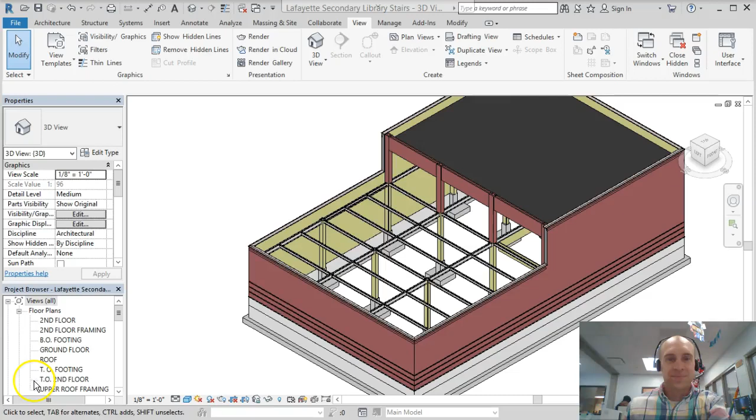You have made your EPDM roof, and now I'm going to show you how to make your green roof. So we are in 3D view. Let's go to second floor view. And don't worry about these things here. You're going to put stairs and an elevator in later on.

I'm going to go to roof. And I already had one created, but your default right now is basic roof, insulation, and metal deck EPDM. And we're not going to worry about changing that right now. We're just going to make the outline.

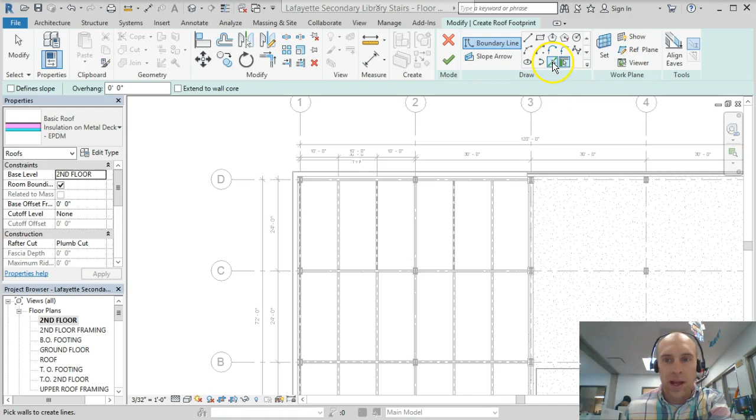So if we click this pick lines, and I'm going to choose just inside here. And this edge, you notice we're not wrapping this one. That one is fine just the way it is. But on this right side, we're going to wrap. So I'm just going to do one of these to give you a couple tips as to how to do that. I like mine on thin lines. We'll go back to Modify Create.

And I'm going to choose the outside edge of this. And this one, you see, it doesn't matter if it's connected necessarily. And this center line. So I have a whole bunch of lines on here. And really all I want is this line and this line. So I click on this Trim Extend.

And if I choose this side here and this line, you notice it trims it to that corner and we're all good. Now if I clicked on this side instead, so I just undid that, and I choose this side and here, it trims to that corner. So you need to be careful. Make sure you click on the line that you actually want to keep, or on the part you want to keep. I want to keep this, and then I just kind of work my way around.

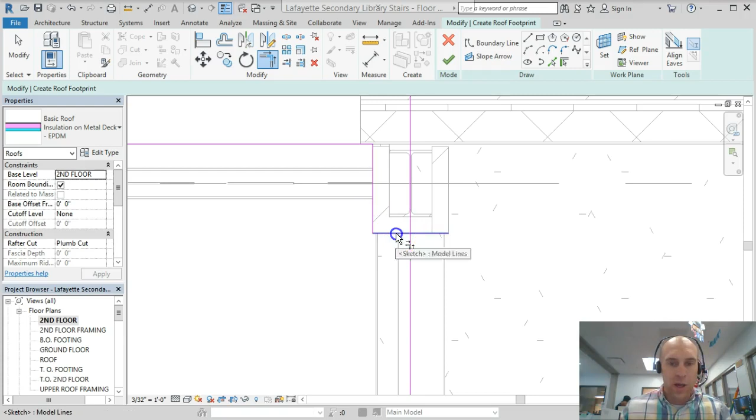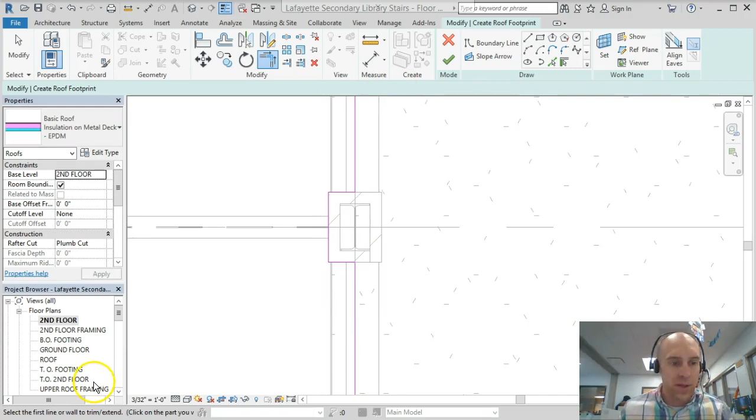This and this are connected just fine, but I want to go here to here, and then that trims that away. So you'll go ahead and continue by drawing more pick lines, and just choose one of those, and then we go and we trim and so on. You can see it deleted that part of the line down there. You'll have to add that again, and then just keep trimming away, and eventually you'll have this whole thing wrapped. So do that right now, and then you can join me again.

So my columns have been trimmed around. You can kind of see each one of those has those lines, but in these corners they're straight. And now I'm just going to hit the green check, and let's take a look at this in 3D. And so now I have another EPDM roof, but I wanted this to be a green roof, so I got to go to the edge of it, and then I can select it.

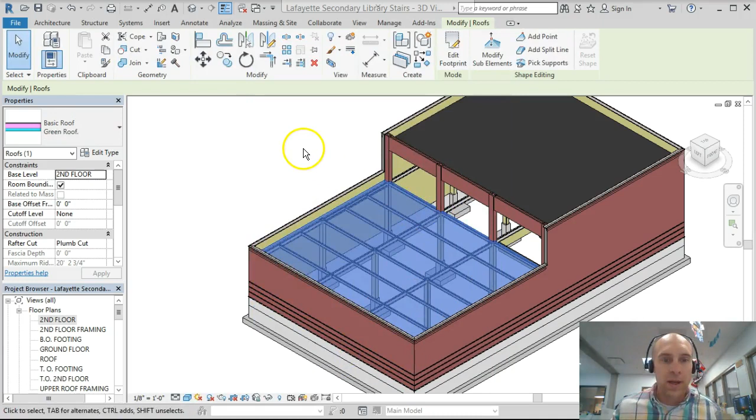I'm going to edit this, duplicate it, and we're going to call this green roof. And I already have one labeled green roof, so I had to put a period on mine. But now we can edit this. So we need to adjust the layers on this thing. We go to Edit Type and edit the structure.

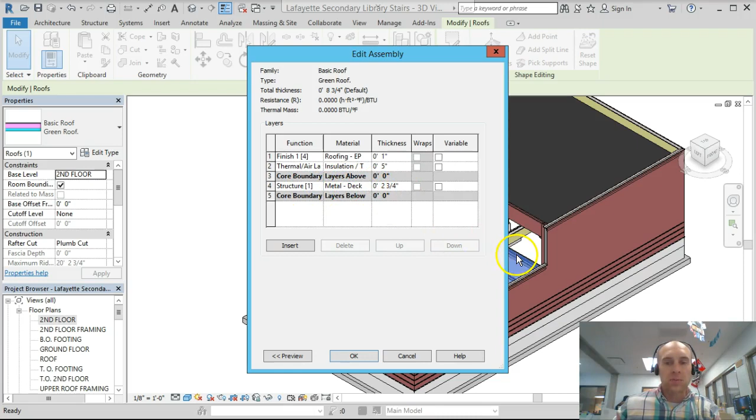And you notice that the metal decking is down below. So this is just a substrate underneath the original insulation and roofing. We're going to want to have this metal decking just because we need something to support the roof. This metal decking is not the same as in your assignment. It's not the same as this drainage plate. It's actually underneath all of it.

So speaking of this assignment, if you chose the G1 or 2 or P1 or 2, because remember we noted that the 3s and 4s are too heavy. So we're going to pick one of the 1s or 2s. You're going to put those directly above the metal decking. So let's go back to this right above the metal decking, which means that we aren't going to have this EPDM and we're not going to have this insulation because the thermal mass of the dirt and the plants here provide enough insulation for us.

So what we need to do is we need to add a layer for protection mat, and then if you have granular drainage or drainage plate and separation fabric, and then your soil, and then plants, which we're just going to use grass. So that should be 1, 2, 3, 4, 5 layers that we're going to add. So we'll do insert 1, 2, 3, 4, 5.

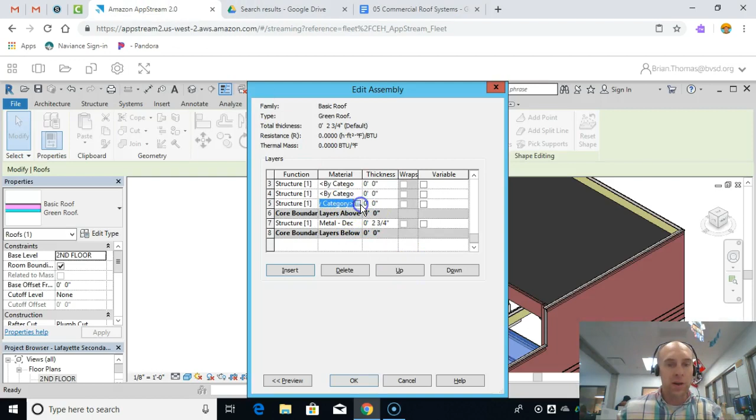And my first layer, if I go back to here, was protection mat for both the G and the P. Protection mat is 1/4 inch. Protection mat is actually a piece of rubber that they put down. So if I search for rubber, nothing is shown here, but if I open this up, then I'm going to see some more options down here.

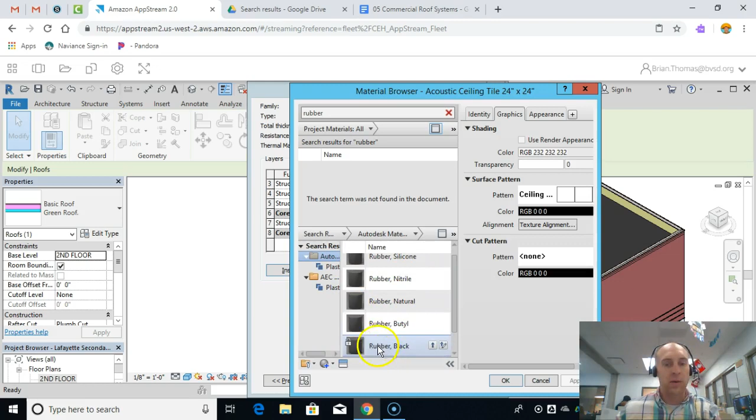Now this first option is actually silicone rubber, which I probably don't want to choose. So I'm just going to choose black rubber for mine. The material doesn't really matter all that much. You just want to pick something that's similar to what we have. So I'm going to apply that one and hit OK. And that thickness for me was 1/4 inch. And then you have to go through and continue on with these.

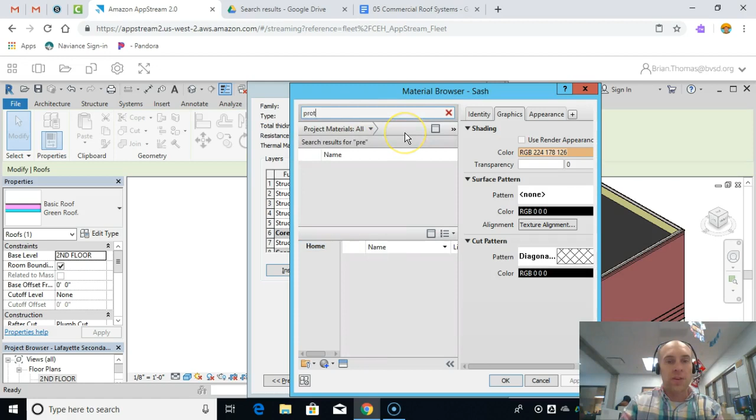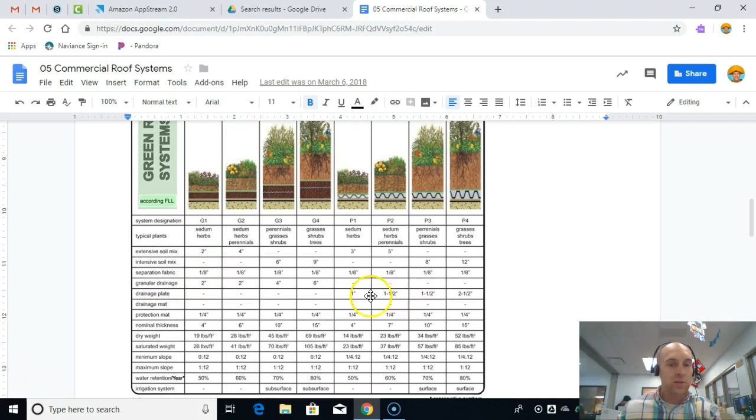Now, if you try to search for the words protection mat, you're not going to find that because protection mat doesn't exist. So you're going to have to sort of figure out what is a similar type of material. Fabric would probably work for this. Granular drainage, we're talking about gravel. A drainage plate is probably steel. So those are some things that you could use. And then you also need to make sure that you have all your thicknesses set. A pretty good thickness for grass, which is going to be your top layer, is about 2 to 3 inches.

But the last thing you need to do to make sure that this actually works is set these structure function numbers so that your smallest numbers are on the bottom. This is a 1, that's a structure, the metal decking, and grass is a finish layer, it's a 5. So as long as it goes from 5 down to 1, and I can make this a 4, and I can make this a 4. It doesn't really matter what we're calling these, as long as it goes bigger number at the top, smaller number at the bottom, then you shouldn't get any errors.

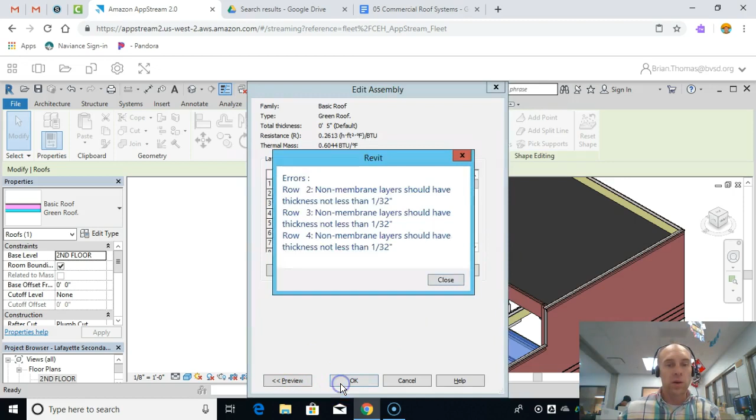And then we can click OK. And it's giving me errors because I haven't actually selected thickness. So go ahead and do that. Make sure your thicknesses match up with the roof type that you chose, and then you should be in good shape with your green roof.